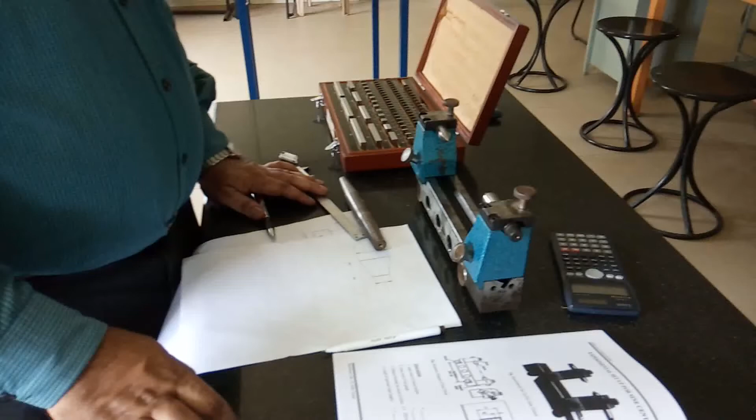Today we are going to do the experiment for this sine center. Here we are going to measure the taper angle of any conical surfaces. After the manufacture to the calculated angle, now we need to find out what is the actual angle of that particular component. The components will be like this way. This is a tapered component, a conical surface. Here it is a bigger diameter, and this side it's a smaller diameter. Now we need to calculate this angle very accurately by using this sine center.

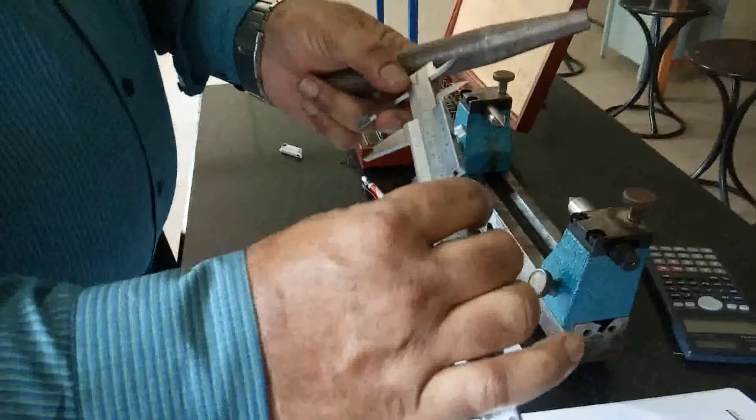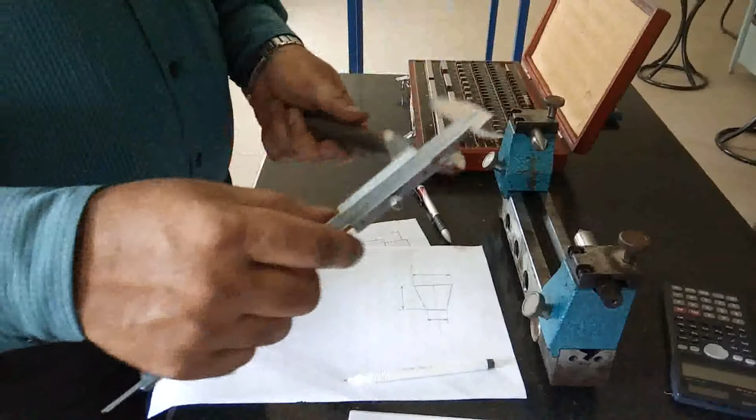This is a component which is used in conjunction with slip gauges. Now here we are going to measure the angle in two different methods. One is the conventional method of measuring this angle by using this vernier caliper, which has a least count of 0.02 mm. So in this experiment the aim is to find out the angle of this conical surface. Now first let us find out the angle by using this vernier caliper.

Now let us consider this angle. Now I am going to measure this major diameter. Can you see this sketch here? This is the major diameter D. I will take it as D, which will be shown in this tabular column as capital D. That is the major diameter, which we will find out by using this vernier caliper.

21, 22, 23.2. So 23.2

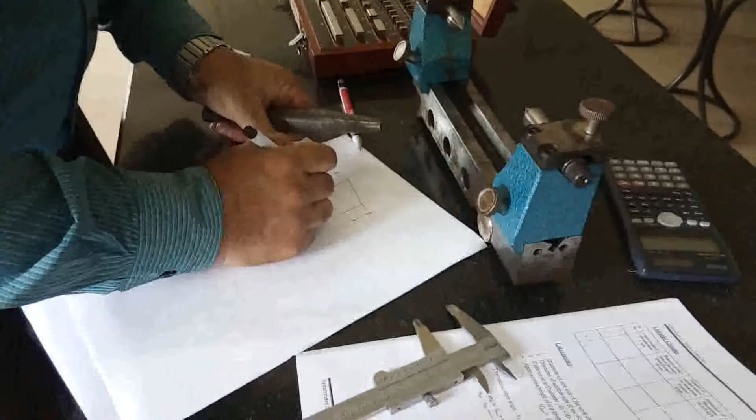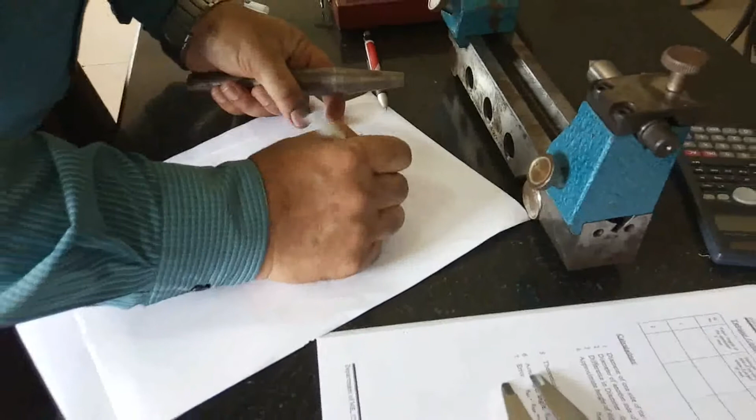mm. Now I am going to calculate this smaller diameter. Let us find out how much it is. 12.72. So small d is 12.72, and the angle tapered length.

Let us find it out by using this method. It's an approximate method only, so that's why we are going to measure this angle by using this sine center. Actually, we need to calculate it by using a vernier height gauge, but here I am going to measure it using the depth bar itself.

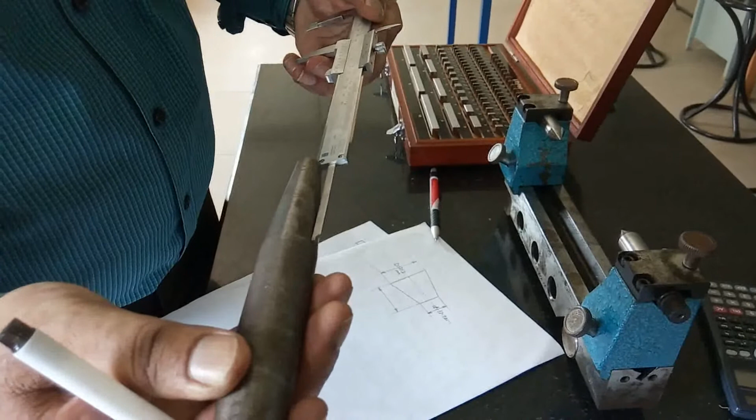See how much it is. It will be around 56.5. Let us consider it as 56.5. So this is small l.

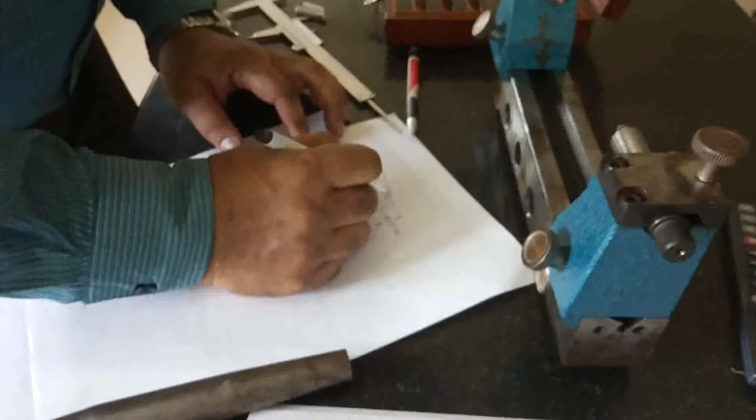Now I need to calculate this angle. How much is it? Half of the taper angle, theta. Now I am going to find out theta. Consider this small triangle ABC. I need to calculate this theta. Now just observe here. This is equal to small d, right? This is a bigger diameter, smaller diameter.

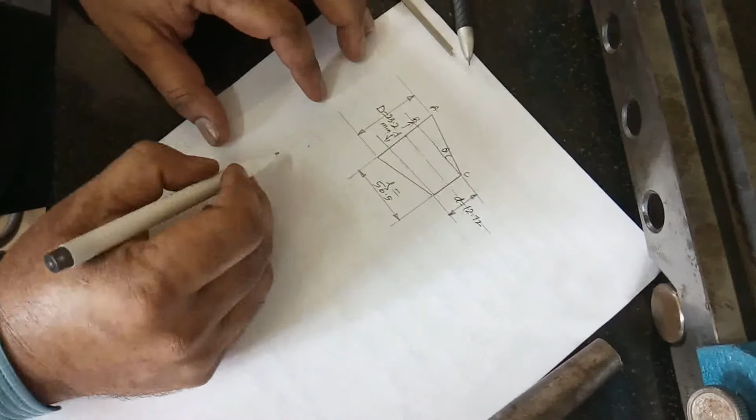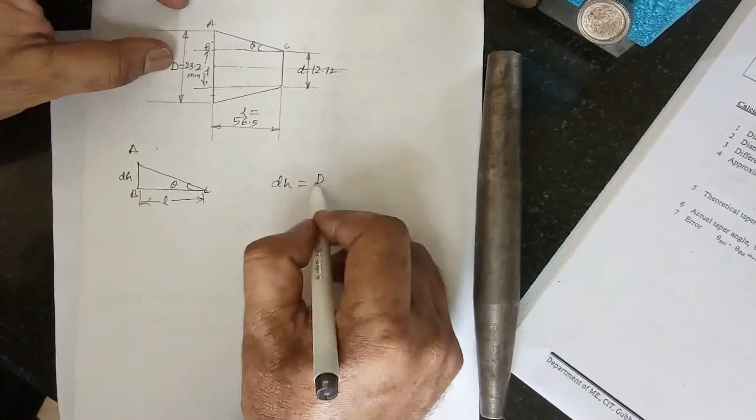Now if you consider this triangle ABC, this is theta. What is AB? That we need to find out. The total diameter, that is the bigger diameter minus the smaller diameter, then you get this plus this. I am going to call it DH. So DH is equal to, this is nothing but BC is small l, right? So DH equals capital D minus small d, divided by 2.

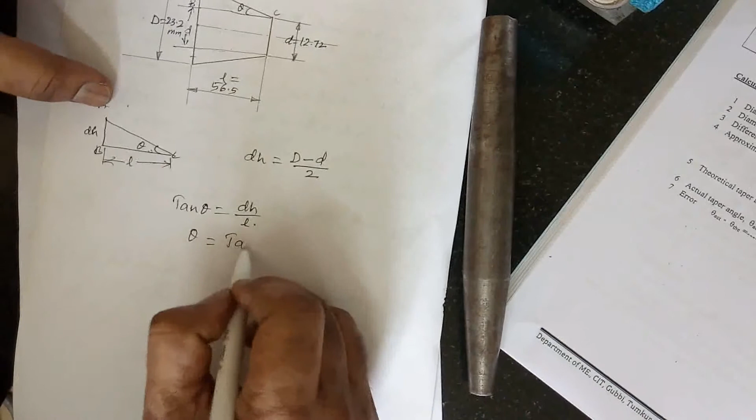Now by considering the tan principle, tan theta is equal to DH by L. So tan theta equals DH by small l. Now how to calculate theta? Theta is equal to tan inverse of DH by L. We know L. How to calculate DH? Already we have taken the measurements.

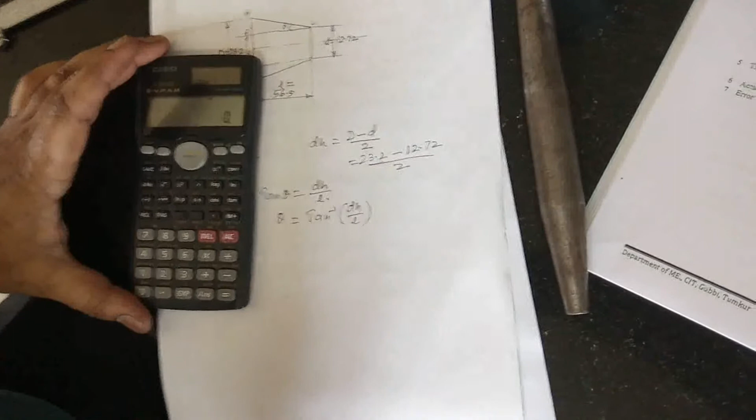D is 23.2 minus 12.72, divided by 2. Just calculate it. Now after the calculation, I got DH as 5.24 mm.

Now put that value in this equation. Theta is equal to tan inverse of DH by L. Finally, we get theta in terms of degrees: 5 degrees, 17 minutes, 55 seconds. So this is the theoretical method of measuring the angle.

Now we are going to measure the same angle by using the sine center and with the help of slip gauges. This is the side we have considered. Now I am going to fix it here. Just observe here, these are the two centers. I am going to fix this component within these two centers. See here, and of course we have to do it like this way, because on this side we can't raise it.

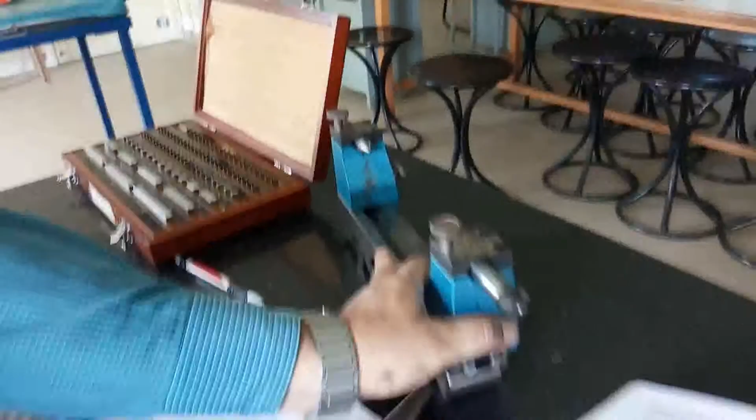So that's why you just observe here. On this side only we need to place the slip gauges, because here we can tilt this way, so the tiltation will be more on this side. You can sense this by seeing this one, it is extended. Wherever we are going to measure the angle, that side should be placed towards the right side. Where the projection is more, there we need to place our measuring side, in between the two centers.

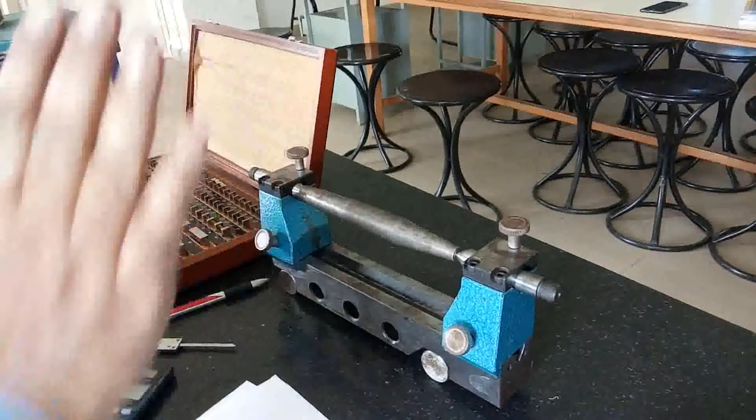Now it is fixed. Now by using the slip gauges we need to raise this one. Okay, now we have calculated this theoretical theta as 5 degrees, 17 minutes and 55 seconds.

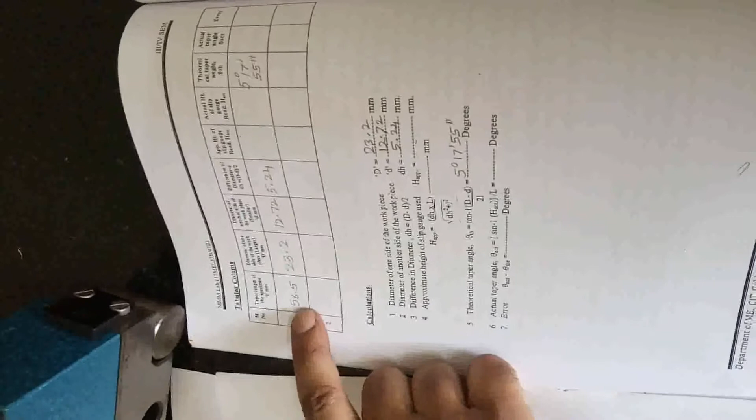So here I have written, this is serial number 1, for one module we have done this. Taper length is 56.5, written here in the tabular column, bigger diameter is 23.2, smaller diameter is 12.72, and DH we found out by using this formula, and that will be 5.24.

After the calculation I got this value as 5 degrees, 17 minutes and 55 seconds. The same thing I have written here also. D and small d, DH is there, and this is the theoretical taper angle. This is a simple way of calculating the angle, but a more accurate method is calculating the same angle using the sine center in conjunction with the slip gauges and dial gauge.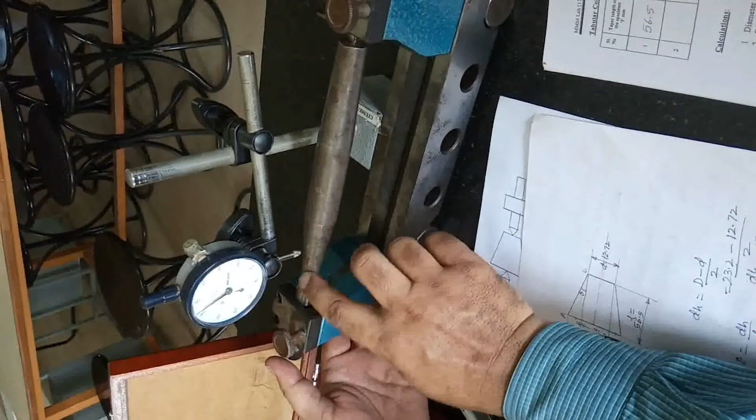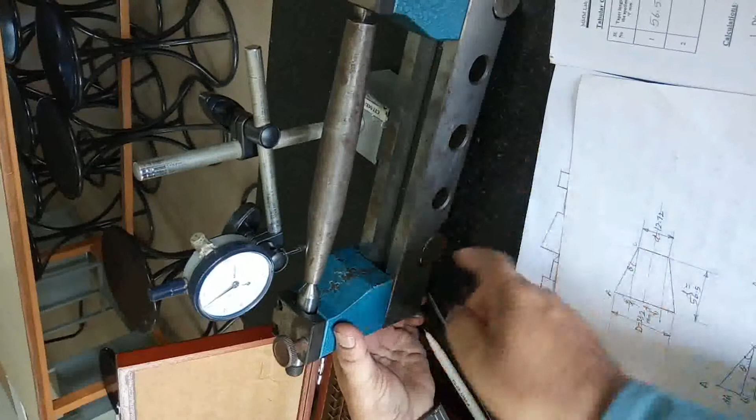Now if we are going to raise this side, this surface will become parallel to the reference plane, that is the surface plate. Now to what extent do I need to raise this one? The same extent, the same angle, which is the half taper angle of this particular component. To the same angle I need to raise this one. How to raise this one? To a specific height by using these slip gauges.

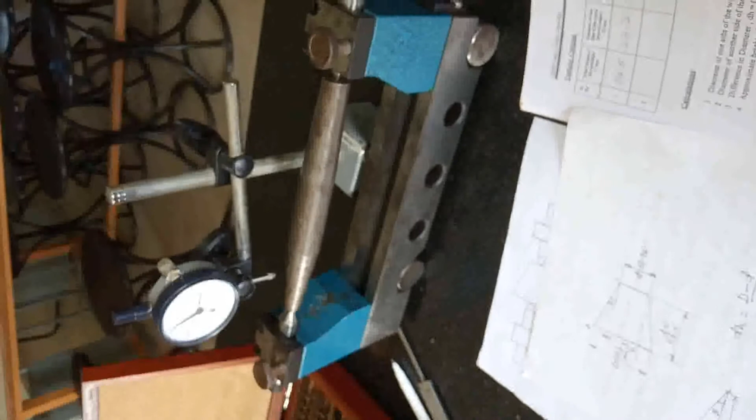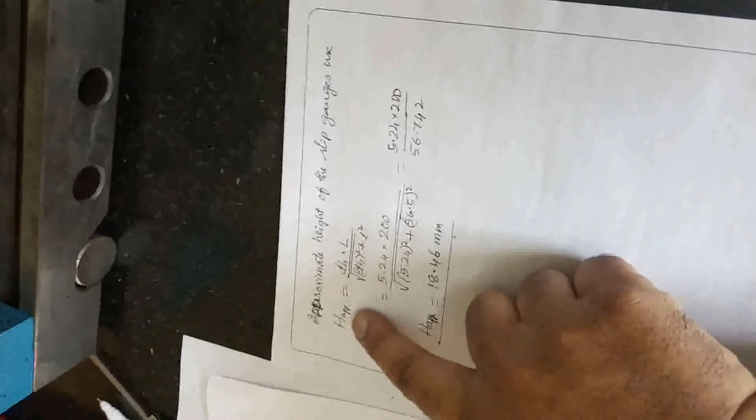Now for that we need to place the slip gauges here, and for that we need to get an approximate height of the slip gauge required to raise this side. I have calculated using a formula: approximate height of the slip gauge to be used, H approximate is equal to DH into capital L, this is the center distance between the two rollers, it's a standard, 200 mm, divided by square root of DH square plus small l square. Small l square is nothing but the taper length of that component.

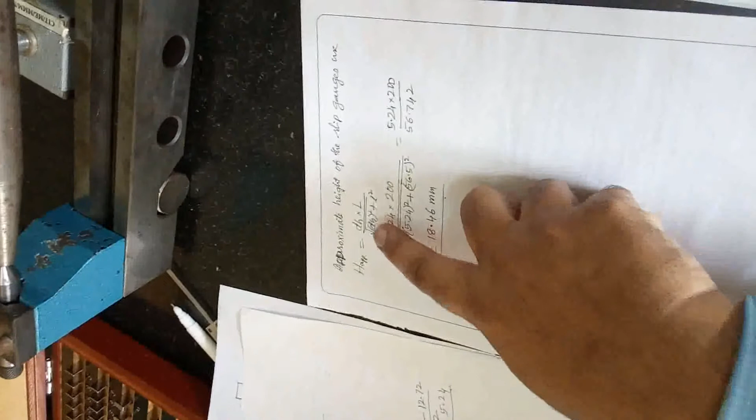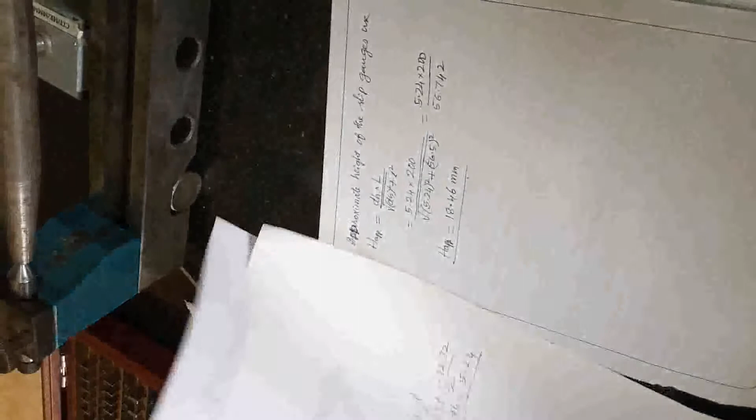After substitution, DH is 5.24, 200 divided by square root of the same DH square plus 56.5, which is the taper length, small l. So I have got the answer as H approximate is 18.46. I am going to write it here. If you don't calculate also, nothing to worry, but we require more trials if you don't calculate this H approximate. Now H actual will be around this H approximate, so it will be somewhere more or less nearer to this 18.46.

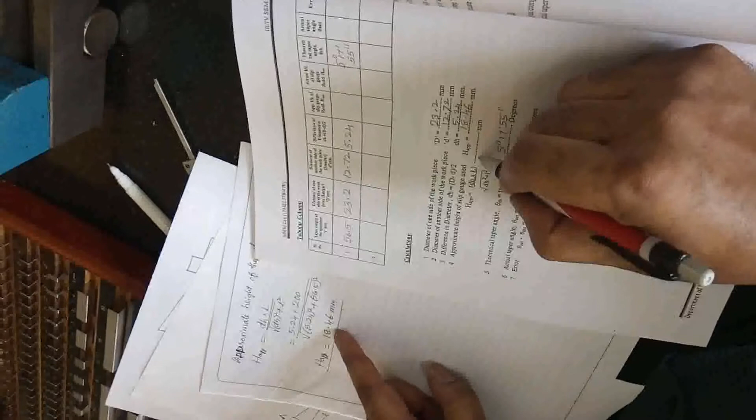18.46 is there, so by using the same formula I have calculated. Now you see theoretical angle is there. Now we need to find out the actual height of the slip gauge required.

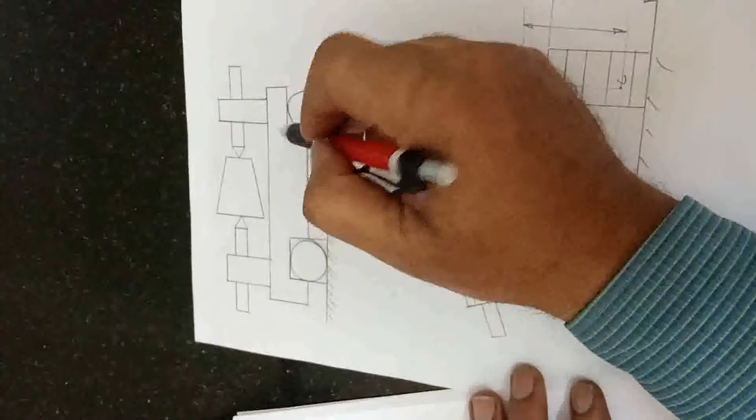Now this side, as it is inclined to the reference plane, we need to raise this side. That means whatever the angle we need to raise this one, the angle will be equal to theta only. Now you see, so this is equal to theta. To that theta we need to raise this one.

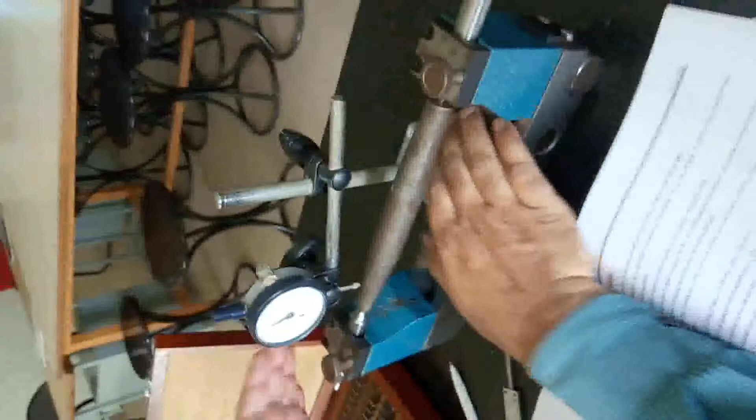Now H, we have got the H approximate. And what is the use of this dial gauge here? If you move the dial gauge over this surface, the dial gauge is going to show you the deviations.

Now in this condition you see it is in the raised condition, that is in the inclined position. Now if I am going to move this one, just observe here. So this dial gauge is a magnetic base.

So if I am going to place this dial gauge here, the plunger is touching the lower end. If I am going to move this one like this way, you see it will be rotating in the clockwise direction. Our aim is to get zero deviation here.

That means it should be still. If this surface is exactly parallel to the base, there will not be any deviations here, it will stood still. But in this case it is now rotating because this surface is rising, because this end is at a lower height and this end of the conical surface is in the raised position. Now we need to make this surface parallel to the surface plate.

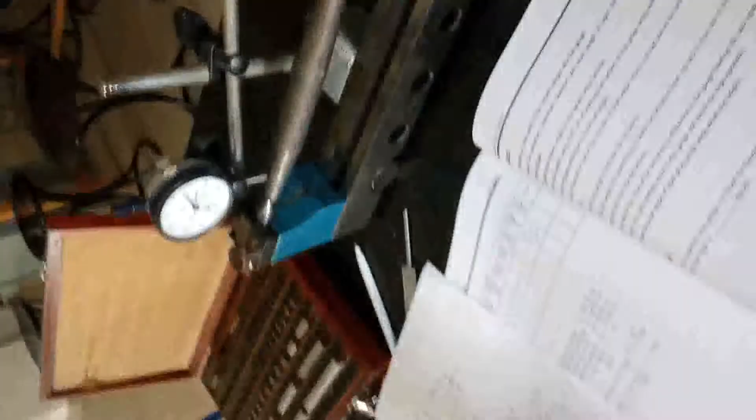Now for that we have to use the slip gauges calculated. Theoretical slip gauges, that is 18.46 is there. We have calculated approximate height of the slip gauge to be used as 18.46.

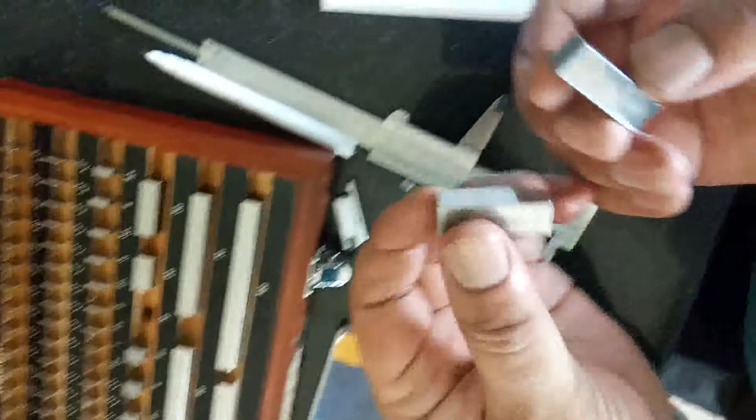Simply I used to take 18. Let us see what happens. Afterwards it is a trial and error method. 10 plus 8, two slip gauges I have taken. I am going to ring them together.

Now I am going to place it below this side, and let us see here. I am going to place this dial gauge, and move this dial gauge. Just observe the dial gauge.

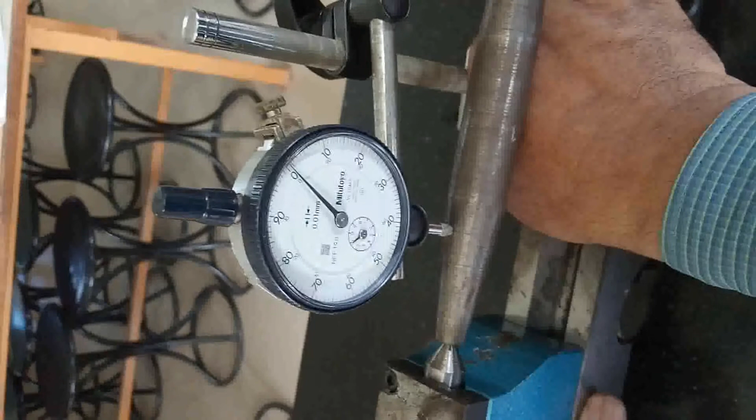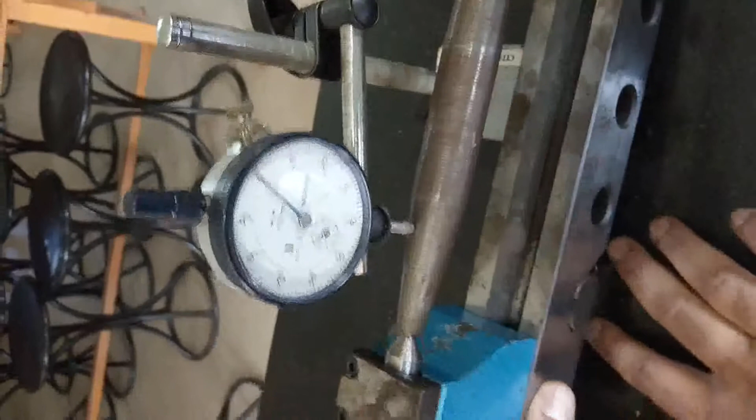It is moving the pointer in the clockwise direction. That means still this surface is at a higher height than this surface. So this end is indicating that somewhat more length has to be put here. This slip gauge has to be placed with more length on this side.

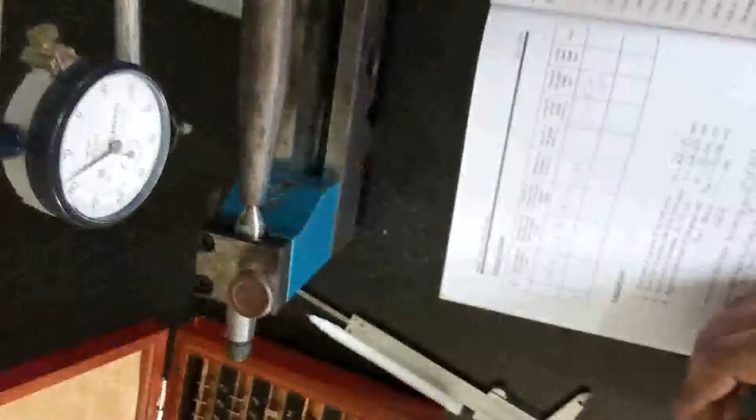So 18 is not enough. After the trial we have concluded that 18 is not enough. That's why let us move on to 19. If it is more, we will come back.

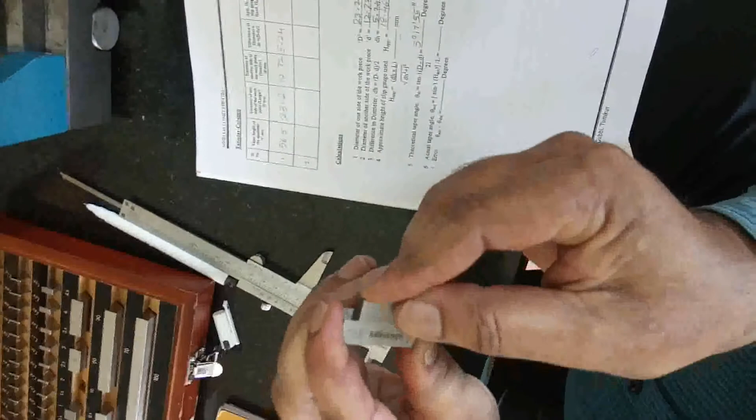Now 10 plus 9 it is there. I am going to stick them together, that is a wringing phenomenon. Now you see I am going to place this 19 here below this side. Let us move this dial gauge over this one. Still it is rising, that is indicating that still more length is required to raise this side.

So I will be going for the next height. Let us move on to 20 directly. Let us see it. So it's a 20 mm slip gauge. I am going to place it here, below this one.

Now let us move the dial gauge over this surface. Now you see it is just fluctuating. That is because of the surface error, surface roughness.

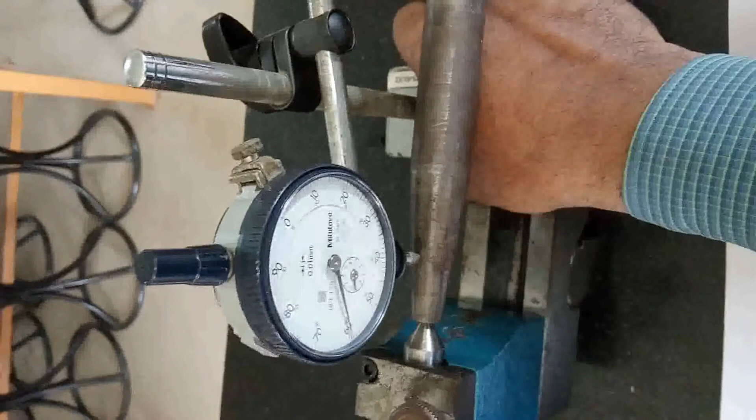So we can approximately take 20 mm. If we are having sufficient time, we can go for 19 plus a bit more on this side, then we will be getting a very accurate reading, where the pointer will behave like it's locked in this position. But as the surface error is there because it is a machined surface, this is enough. So we can take 20 mm as the actual height of the slip gauge.

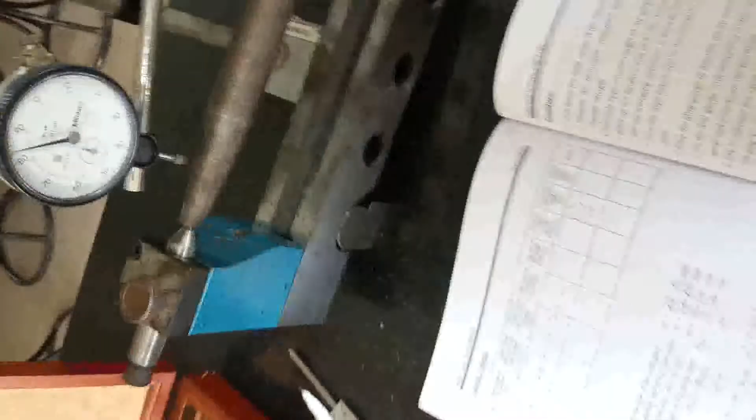Now you can see this sketch, this is the experimental setup. You see, I have raised this surface. So here is the dial gauge I need to place.

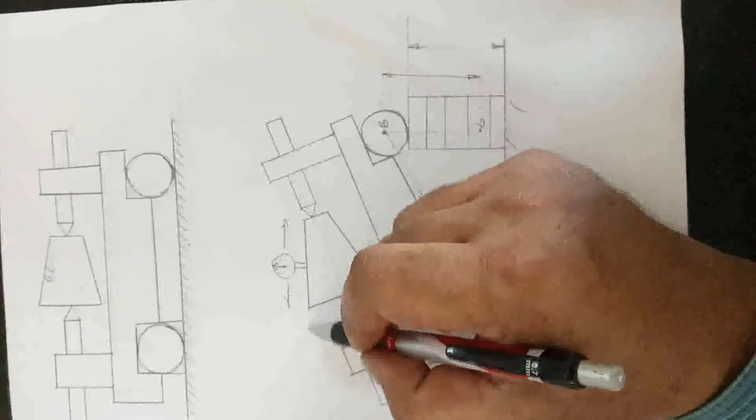You see, the dial gauge is there. I am going to move this one. There should not be any deviation in the dial gauge. The dial gauge is behaving like this surface is parallel to the surface plate. Now, how much height have we used here?

So this will be H actual, which is equal to 20 mm. Now there's one logic you will hear. Just observe here, can you see this triangle? A, B, C. I'm going to write it here.

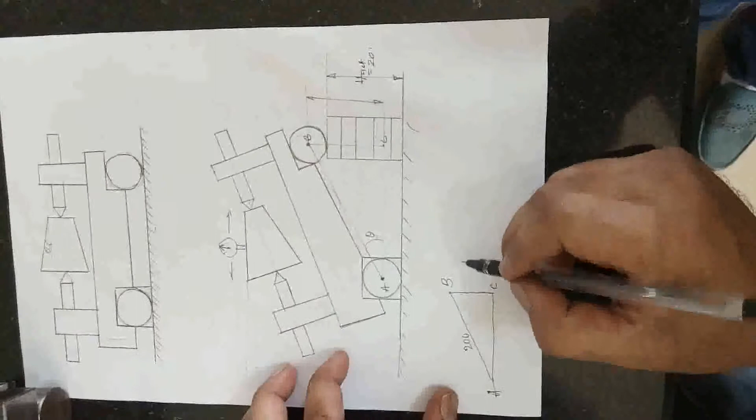A, B, C, the same triangle. It's an imaginary triangle. Now, what is the length of AB? It is 200 mm, the distance between the two centers of the two rollers, and BC is equal to how much? That is what we need to find, BC.

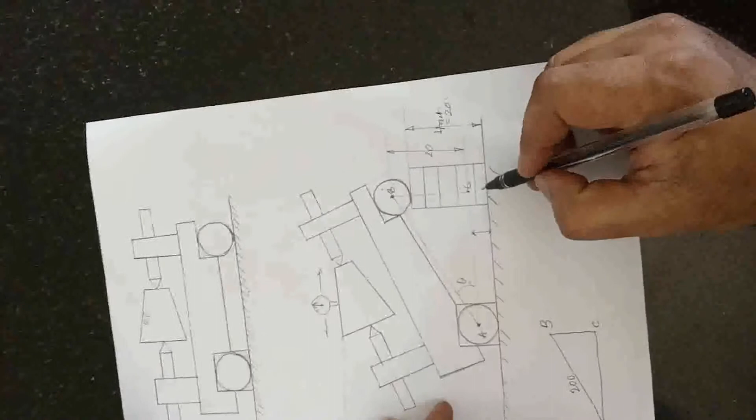Now here we got H actual as 20, but what is BC? BC is also equal to 20. Why? Because this length is equal to the radius of this roller. In this length, H actual, if you subtract this radius, the same radius of the other roller will be added here. That's why this is also equal to H approximate, H actual only.

I'm going to take it as 20. This angle is equal to the half taper angle of the component. The component's theta is equal to this theta, to whatever angle the sine center is raised or tilted, the same angle. That's why this surface is parallel to this one. Now in this triangle, let us find out the experimental method of calculating theta.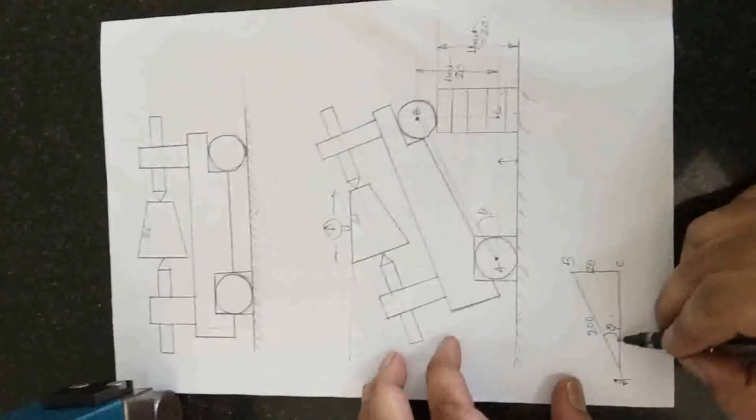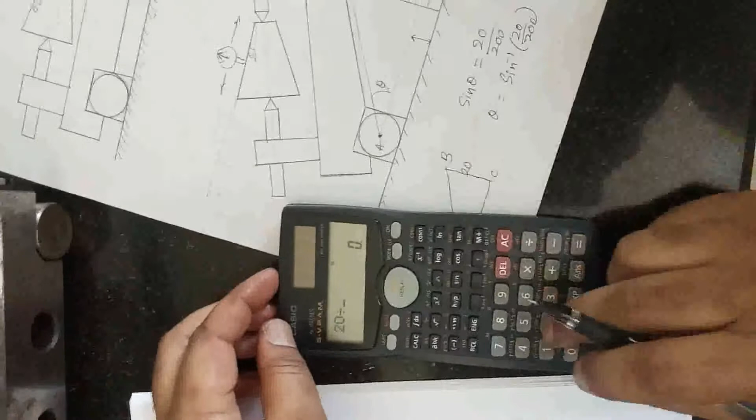Here, using sine theta equals opposite side by hypotenuse, so 20 by 200. So theta is equal to sine inverse of 20 by 200. Now let us find it using this calculator. 20 by 200, that equals 0.1. So that is the sine inverse of theta. Shift sine, right, see.

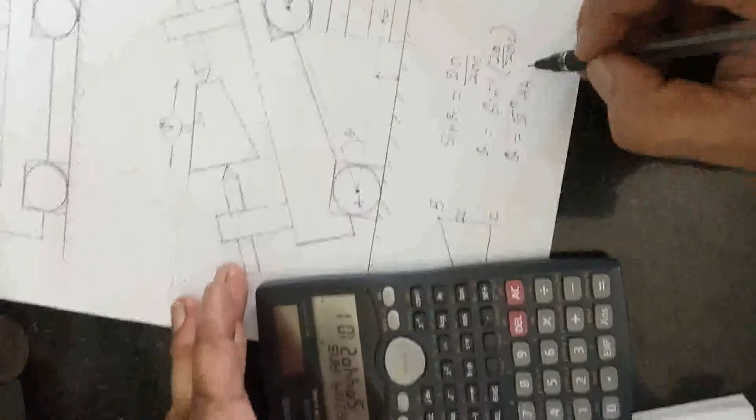So what is the angle? Theta is equal to 5 degrees, 44 minutes, and 21 seconds. This is the experimental method of calculating theta. So in the manual I am going to write it here: actual taper angle, theta actual, that is sine inverse of what we calculated, that is equal to 5 degrees, 44 minutes and 21 seconds.

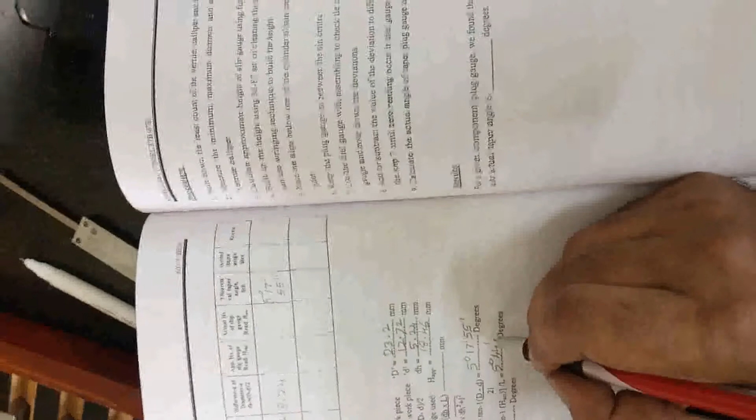So this is the error between theta actual and theta theoretical. Now I can write it here itself: 5 degrees, 44 minutes, 21 seconds, minus 5 degrees, 17 minutes, 55 seconds.

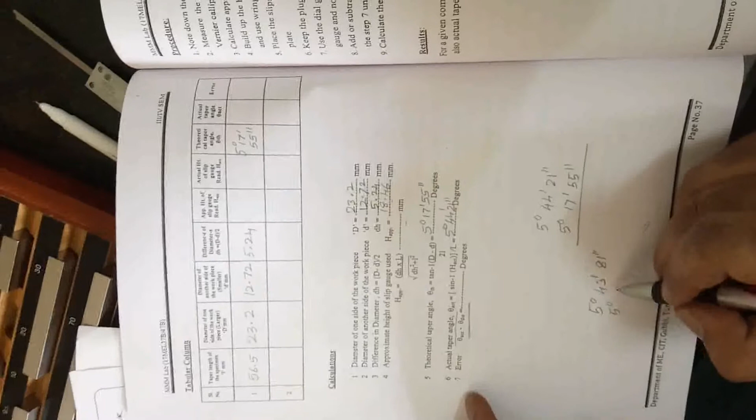Now how to calculate it? You see, this second value is lesser compared to this one, so I am going to borrow 1 minute towards this side. I can write it as 5 degrees, 43 minutes, and here 60 plus that is 81 seconds. And here, 5 degrees, 17 minutes, 55 seconds.

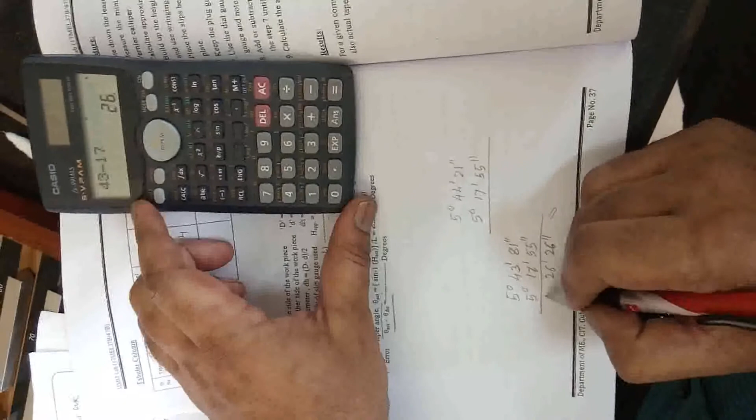So now what is the error here? 81 minus 55 equals 26 seconds. Next, 43 minus 17, that is 26 minutes. So this is 0 degrees. The error is equal to 26 minutes and 26 seconds.

Here I can write it as error: 26 minutes and 26 seconds, or you can write it as 0 degrees also. So the approximate height of the slip gauge, how much did we take? 18.46. But what is the actual height of the slip gauge we have used?

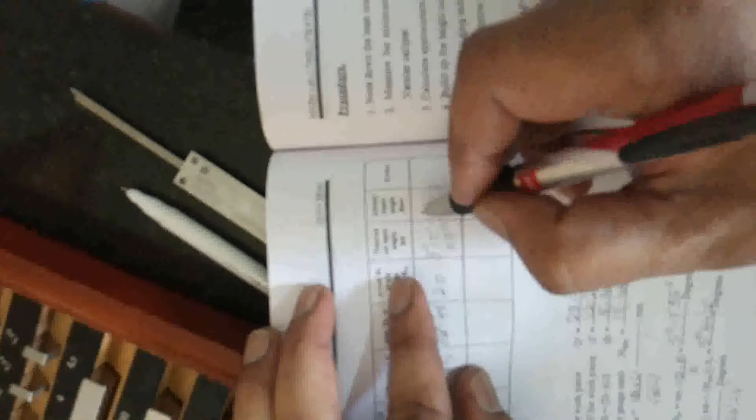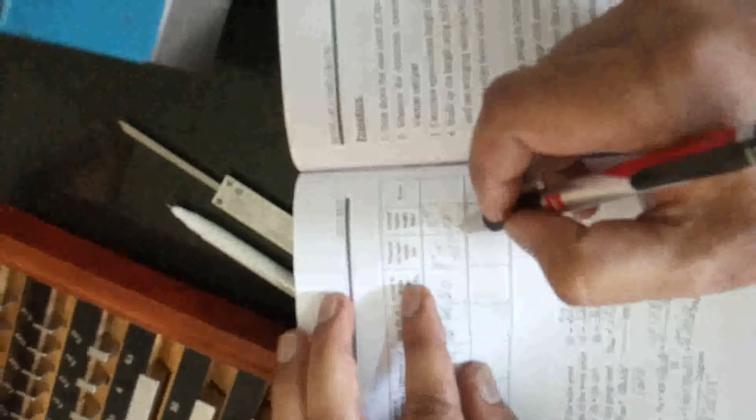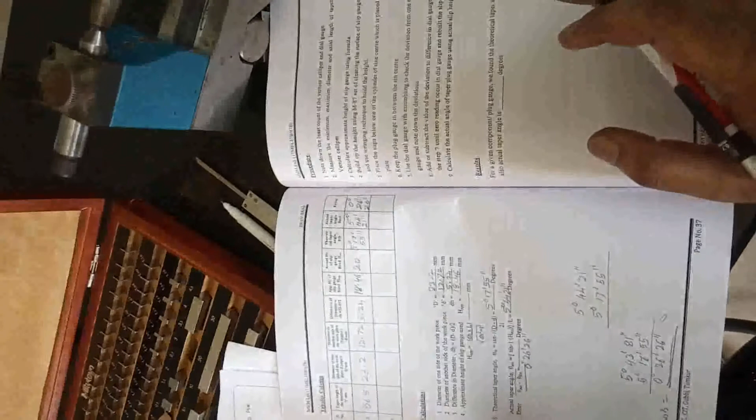This is what we have done for one component. The same way you can do it for other conical surfaces. So thank you all, this is about the calculation of the taper angle of any conical surface, very accurately, using this arrangement, that is the sine center with slip gauges and this dial gauge. Thank you all, this is about the experiment.